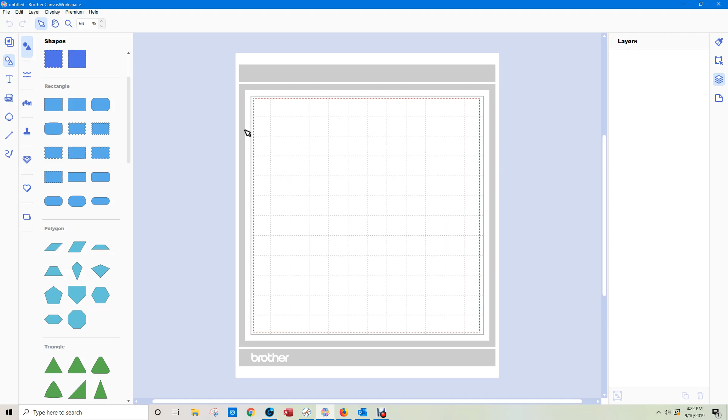So I'm going to start with a rectangle. First of all, I'm going to do the back. I'm going to make sure the aspect ratio is turned off, and make it 140 by 122.

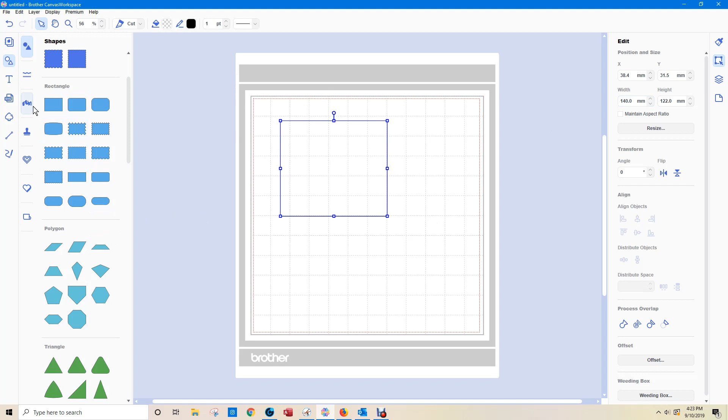I want to add a border to the top, so I'm going to my borders, down here to the hearts. Now for this I do want the aspect ratio on, and I'm going to make it 140 wide.

Just bringing them close, I'm going to align them on the edit menu to the center. Now I just want to bring this down a little bit. I want it below the hearts, and just make that a little bit bigger so we can see what we're doing. Let's have a look here.

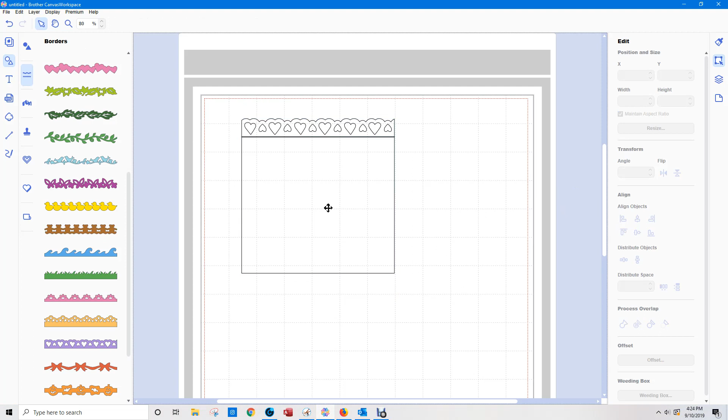I want it to end up 140 by 140. I'll just take that down a smidgen more. 138. I may need to make the bottom one just a bit bigger. No, so what I'm going to do is make this 124.

Without the aspect ratio on - let me just turn that off again. I'm looking to end up with 140 by 140.

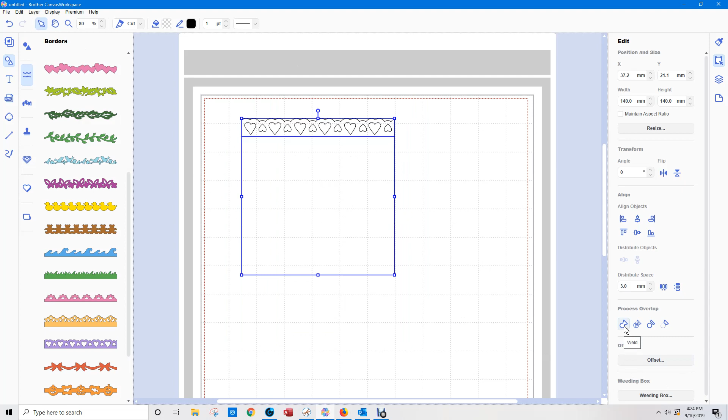Now I need to take that up just a smidgen because I'm going to merge it in a moment. Let's see how we're going. Spot on, okay, that's given me spot on what I want. If I weld that on the edit menu under process overlap, that's exactly what I get, and that's what I want. So that's the back done.

Okay, these bendy cards have two sides, so let's look at the first side. Now this one I'm going to make about 150 wide by 64.5 tall.

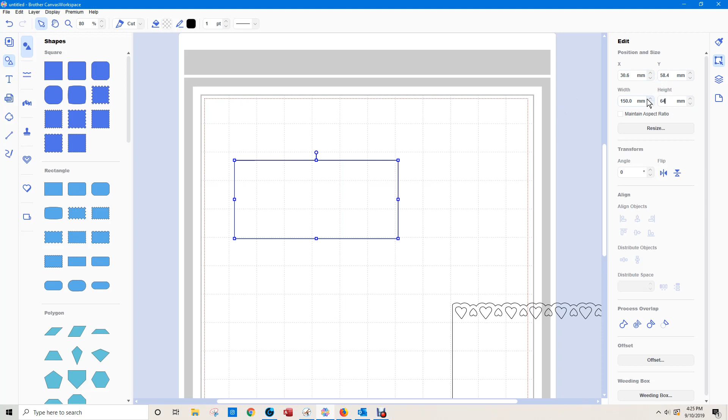I want it to come almost - it will be wider, but I'm just wanting to make sure it's not too high here. So if I wanted to make it higher, well I could. Depends on how much of the top of this card you want showing.

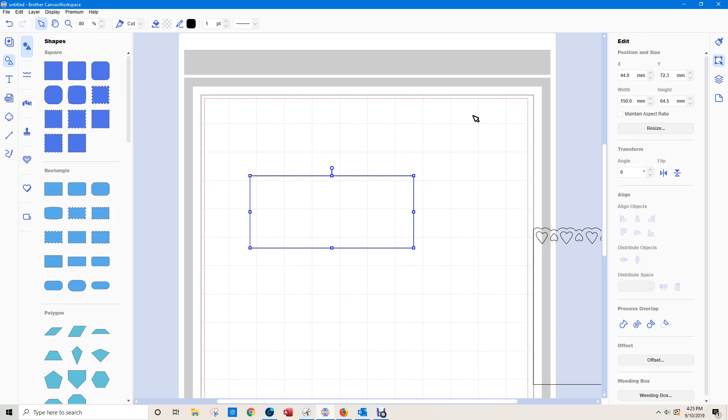Okay, now this particular one, I want to have a bit of a scallop out there. There's a couple of ways to do this. You could muck around with the nodes, and I have done that. But one easy way to do it is to bring up an oval.

Place it pretty much where you want it. Now I'm going to make that a bit wider, so I've just got a little dip on the end here, and there. That's on the front, and then I'm going to remove overlap. Sometimes I do this the wrong way, but I've done it the right way today. Okay, so that's given me the scallop type edge I want.

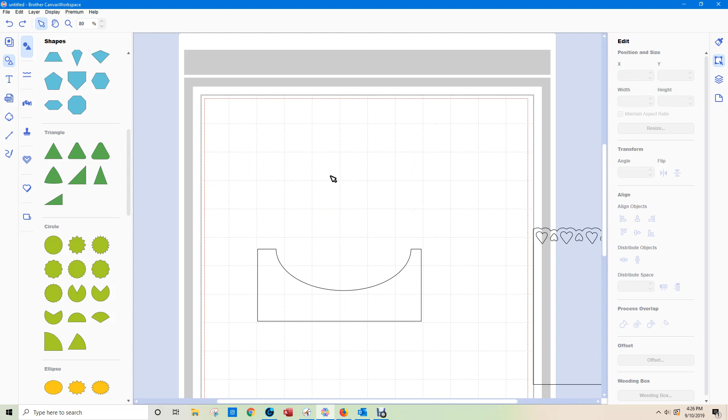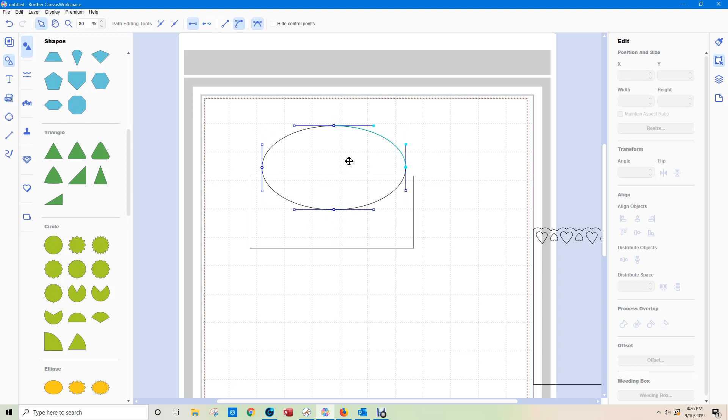But I'm a bit worried that's not going to leave me enough room, so I'm just going to undo that for a minute. And I'm going to take it up a bit, because I need to be able to have a cut line underneath there for the other side to slip into.

Let's try that. I think that might be better. So again, we're going to remove overlap. That might be better, I think.

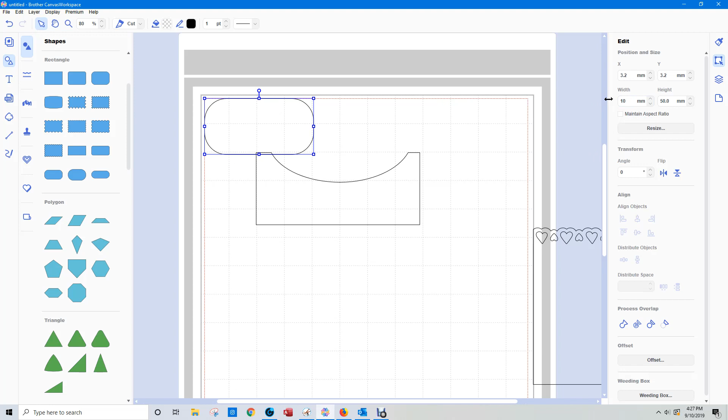Okay, now there's a couple of things I want to add to this. First of all, I'm going to add a tab, and I'm going to make that 10 millimeters wide and 25 millimeters long. I'm going to bring it over on this side because this is the left hand side we're doing.

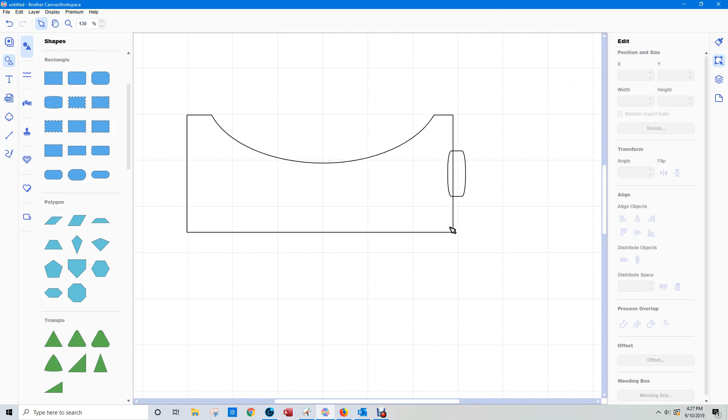And I'm going to align the objects to the middle, and I'm just going to go in there a bit. I just want to make sure that the curves on the inside stay on the inside. Yep, that looks fine. So I highlight it and weld it. I've got my tab to go in.

Now I need two more things on here, but we're just going to do one at the moment, and one of the things we need is a fold line. So if I look at this, it tells me it's 64.5 high, so this needs to be 64.5 high, and I'm going to make it a dotted line for a fold line.

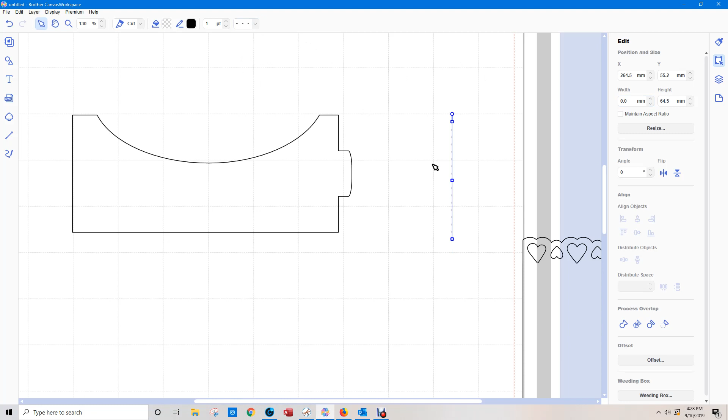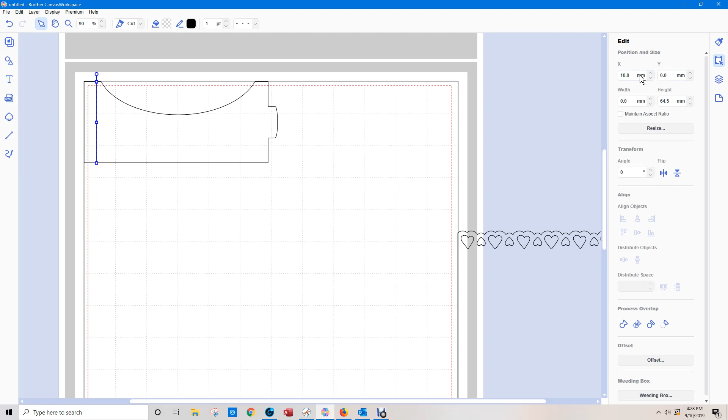Now, to make sure I get this placed in exactly the right position, I'm going to take this to 0 on the X and Y coordinates. X is from the left hand side, Y is from the top. Now this one, I'm going to have 10 millimeters in from the edge and 0 for the Y. So it's placed exactly where I want it.

Okay, I'm going to group all that, and I'm going to call that left. That's the left hand panel almost done. We've got one more thing to do, but first of all we're going to do the right hand panel.

Okay, so for the right hand panel, again we'll start with a rectangle. I'll go into here - the aspect ratio is off so I can do it the right size, and this one I'm going to make 145 by 24.5. You can, oops, no, not 24.5.

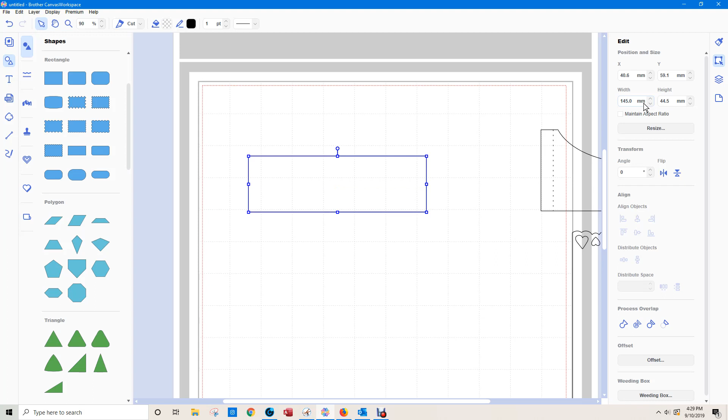44.5, I think I want... just want to make sure it's not quite as high as that one. Let's have a look. So when it's sort of brought around, just want it cutting into it like that. That's about the size I want.

Okay, let's go back here. Now, again, we need a little tab on the side. So again, we're going to make that 10 millimeters wide and 25 millimeters high.

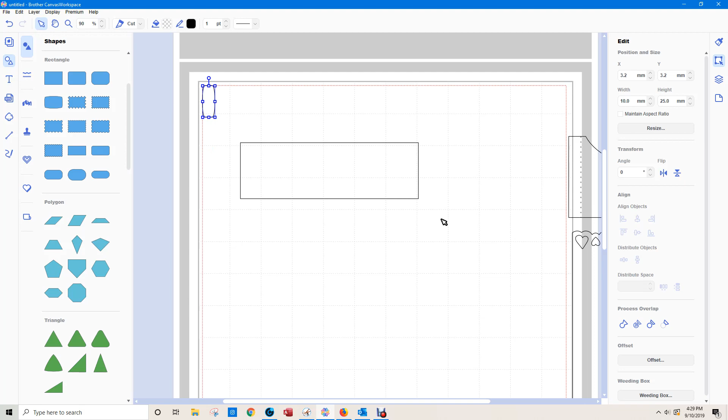Okay, this one's going to go on the opposite side, and again I'm going to go in just to make sure that the round edges are within the box, so that I only get round edges on the outside, not on the inside. I'm going to align them in the middle, and then I'm going to weld.

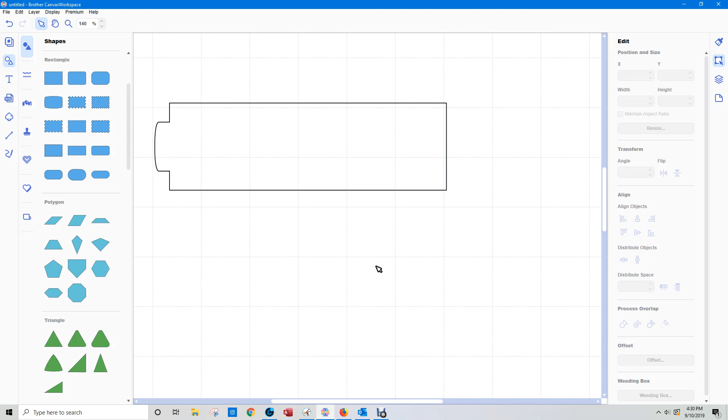Okay, now I want to put a fold line on this one as well. The easiest way to do that is to flip it. I'll tell you why, because then I can use my X and Y coordinates again.

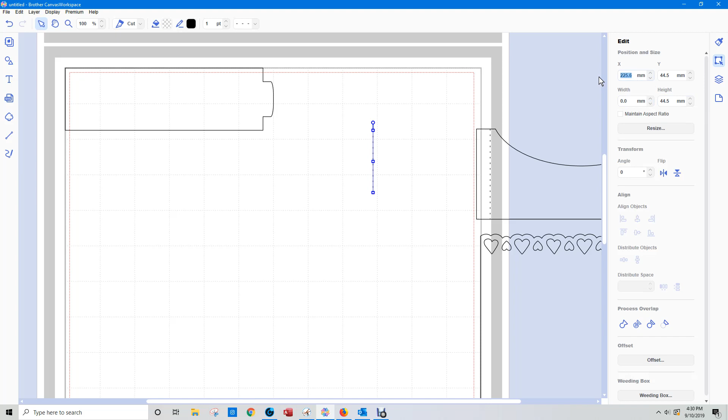And get it up there. I can use my pen, holding down the shift key, to draw a straight line. This is 44.5 high, so I need this to be 44.5 high. I need it to be a fold line, and I need it 10 millimeters in and 0 millimeters down.

Okay, I'm going to group that, and I'm going to call it right. Okay, now I need to flip that back. I only flipped it that way to make it easy to put the fold line in.

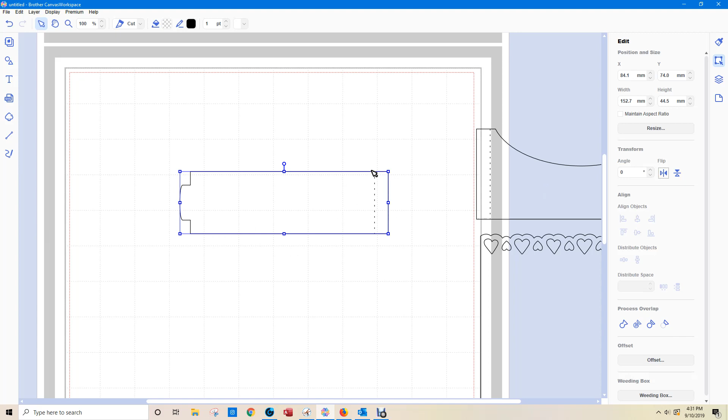So we have one with a tab on the right hand side and one with a tab on the left hand side, and they go pretty much into the card like that. Now I need to draw a cut line for the tab to go through.

So again, I'm going to hold down my shift key and draw a cut line. Now I know the tabs are about 25 millimeters, so I'm going to try 28. I may need to make that a little bit bigger. You've got to be able to fill it in.

This is a cut line, so it doesn't need to be changed to a fold line. Okay, I'm just going to copy that because we need to put one in the back as well, but let's do this one first.

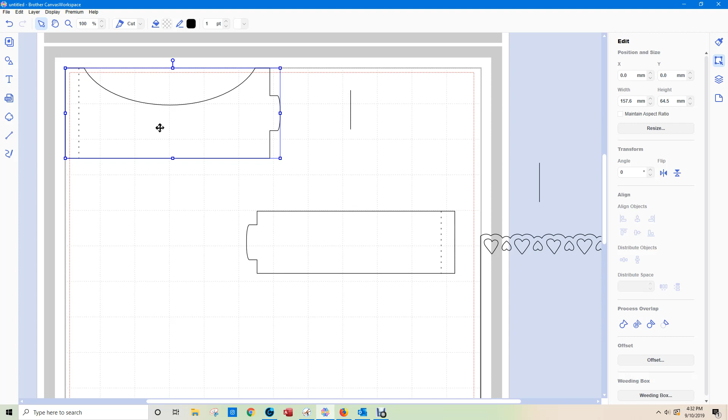Okay, I know that I wanted about two-thirds the way across. It's 150, so almost 160 wide. Let me see, I think I might go... let's try about 75, it's about halfway across.

Now it's obviously too high, but I'm just looking at this for a minute and I think it's too wide. I want to be able to cut both those panels in one piece, and that's not going to work, so I need to make this a bit smaller. I'm going to take it down to 155.

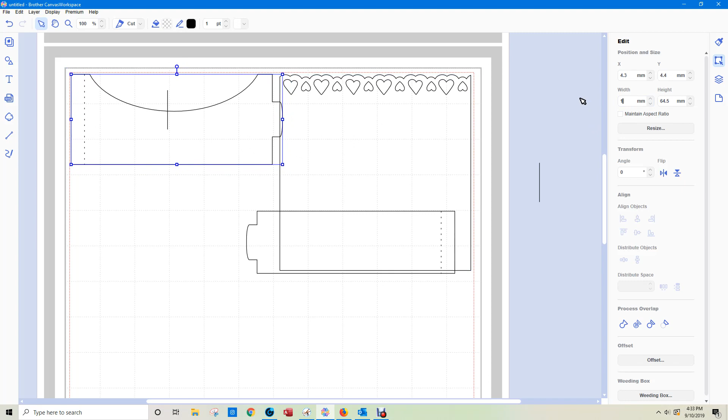So if I take that, will I get both cut? Nope, I'm going to take it down to 152. So you can start with a slightly smaller rectangle. What I want to do, to save paper, is cut both of those out in one sheet.

Okay, now I'm going to put this back up to 0 and 0. I'm going to put this one up here and align the bottoms, and highlight this one and move it across a bit.

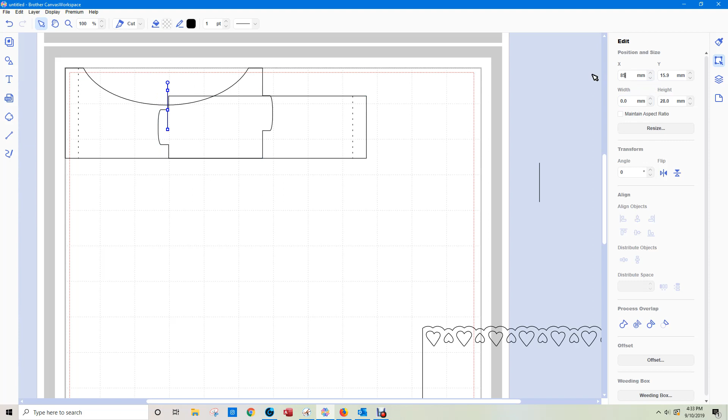What I want to do here, in fact I think I might take that line there - I can highlight it, there we go. I might take it to 85. The reason being is that it'll give more of a curve at the front.

So, okay, now selecting that line. Now if you have trouble selecting the line, go into your layers and just highlight it until you find it. That's our second one, there it is there.

So I can now move it down so that the top square is just above where the tab is, and the bottom square is just below. Click off so you can see - it's not looking too bad, but I think we might need it just a smidgen wider.

So we've got it at 28, let's make it 29, and let's select it again and take it up just a bit. It's just a matter of seeing that you can push the tab in there without any trouble.

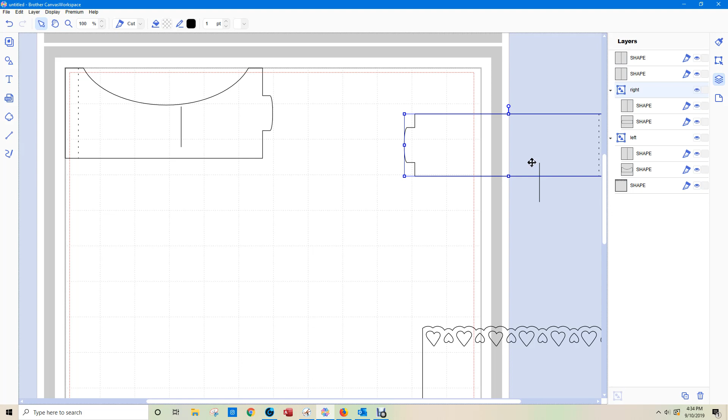Okay, so I'm going to pull that one down into the left shape. Okay, so that's all grouped together, that's that done.

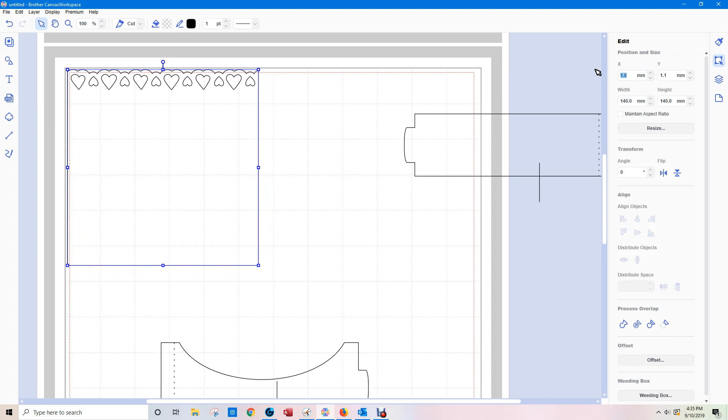Now, I'm going to bring this one up here. And again, I'm going to take it to the 0 and 0. I just find it easier placing lines where I want them if I do this.

Okay, now I'm going to align the bottoms here, because again, it's that joint that I want to do it. And this one - like I said, can't find it, whoops, no, it's this one I want, sorry.

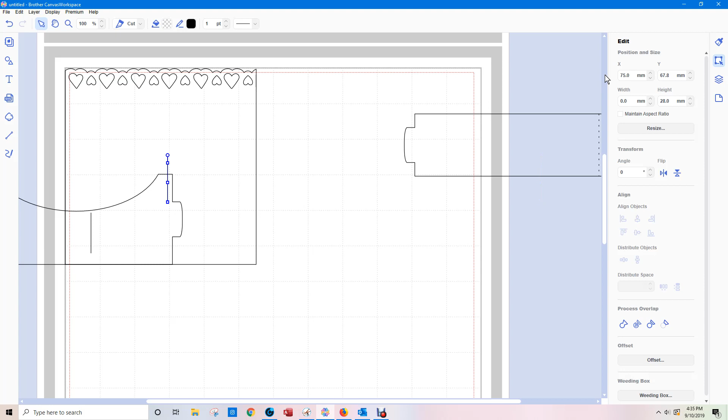Let's see, let's put that at about... I might try 75 on this one. Let's have a look and see where that goes. Yeah, that would be about right.

So let's just move this box over a little bit, line it up with about the edge of that. It doesn't have to be precise. Now we've got to select that shape, and using our arrow keys, just take it down.

This means you can adapt it to any size that you want. Gone a little bit too far there. Clicking off, you can see - if you can't see, just move that over a little bit. You can see the tab will fit through there.

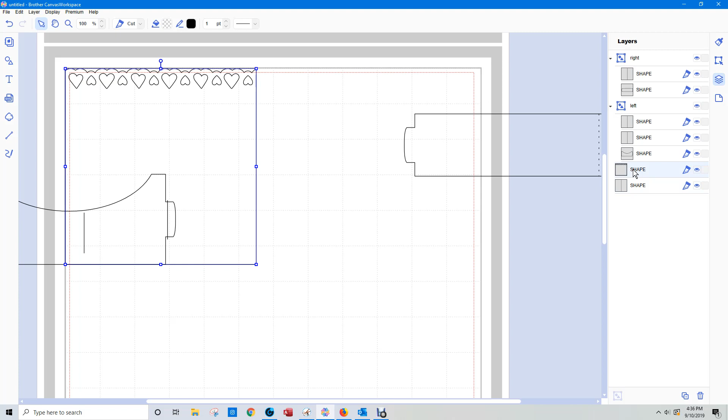Now I need to move that tab down with that shape and group them. And I'm going to call that back. So there are 3 pieces.

A back, which I need to put in within the red lines. There's the back, there's a left-hand side, and there's a right-hand side.